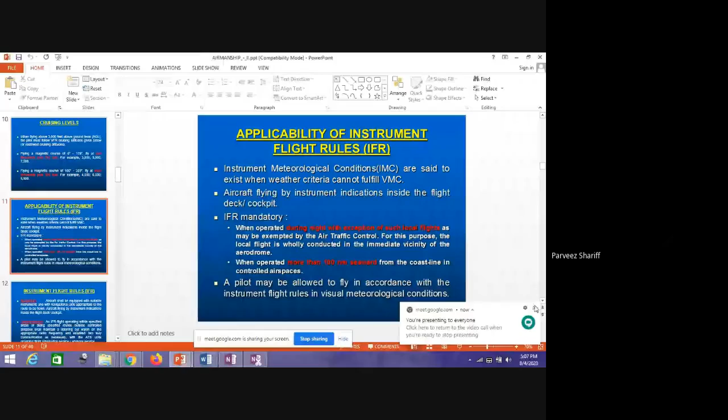So IFR mandatory conditions were discussed in the last class. No, sir. So this is the applicability of IFR rules, that is instrument flight rules. Instrument flight rules, I remember we have discussed it. We'll have discussion as you told.

No. So when the weather conditions are not favorable for visual meteorological conditions, then we'll go for instrument flight rules. Means we'll completely depend on instrument meteorological conditions.

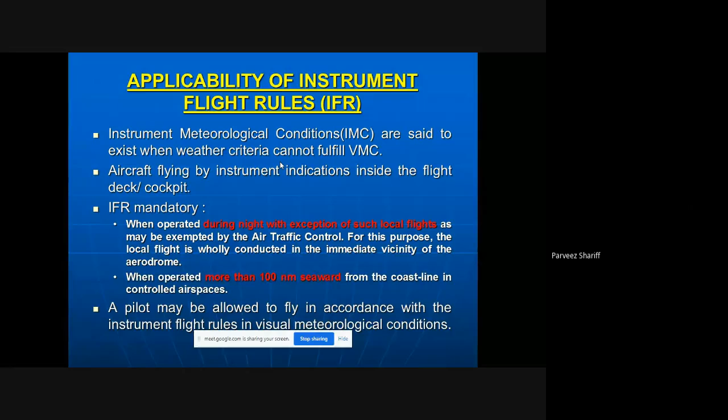So IFR mandatory conditions are when operating during night, with exception of such local flights, and when we are operating above 100 nautical miles towards the sea, means from the seashore. These are the conditions. The equipment should be well fitted with all the latest equipment which allows for navigation and communication. So that is what it means.

It means in IFR you should have a long range communication equipment so that you can communicate with ATC when you are flying on the sea beyond 100 nautical miles from the seashore, and the equipment should be fitted enough in navigational systems. You should be able to fly in the night time.

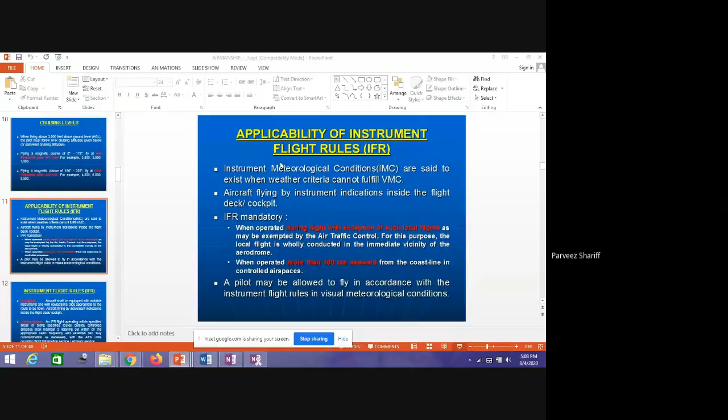So the minimum height is decided by DGCA as well as ICAO. What does ICAO stand for? Can anyone tell me? Let me write here so that you can see what I'm talking about.

International Civil Aviation Organization. Why are you so doubtful? Any other answers? International Civil Aviation Organization, sir. International Civil Aviation Organization. Very good. Okay, both of them are correct. Good.

Then what is DGCA? Directorate General of Civil Aviation. So where does this DGCA exist? India, sir. It works in India. Okay, very good. So this DGCA exists in India, with headquarters located in Delhi. So DGCA rules and regulations are meant for the vicinity of India, whereas ICAO is applicable internationally.

Okay, all the VFR, IFR, whatever rules have been designed, that is decided by ICAO. So the minimum height conditions in the IFR means in high terrain or in the mountains at a level of 600 meters or 2000 feet.

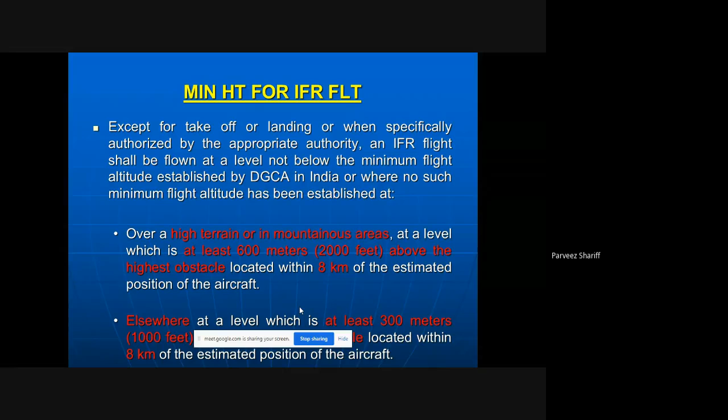So better you have only one kind of metric, so we'll talk in terms of feet. So 2000 feet above the highest obstacle within a radius of 8 kilometers. Elsewhere it is 1000 feet, again with a radius of 8 kilometers.

Okay, so this is very important. I think we stopped at this point, if I remember correctly. Yes, sir, so right of way. Oh, Kiran, now you got it. Okay, that's good. So there is something called right of way.

I gave an example of, I think, a gentleman and a lady. So when both are approaching at the same point, then what happens? Then the gentleman gives way to the lady, right? So likewise, I think I've given an example in the last class, so this is the order.

So balloons have got the right of way when compared to gliders, and gliders are given priority, and other tugs and gliders will give way for it. Then airships will give way for the gliders. Then helicopters will give way for airships, and power-driven conventional aircraft will give way for helicopters.

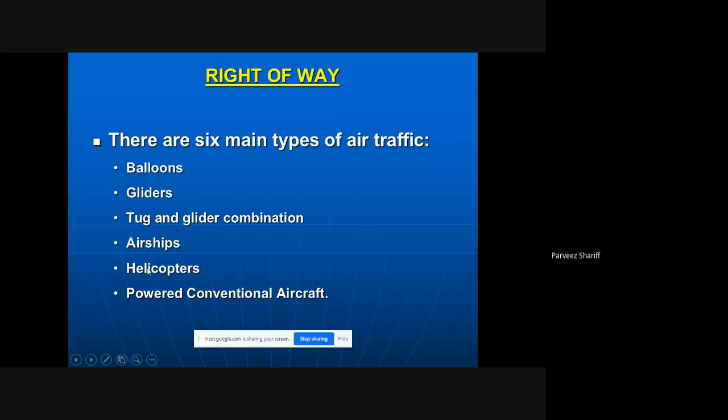That we'll see, what are the different conditions. So as I told in the last class, balloons don't steer, meaning you cannot control the direction of the hot air balloon. It can go in only one direction, either it can go high or it can go low. That's it. Whereas the other direction is driven by the flow of air.

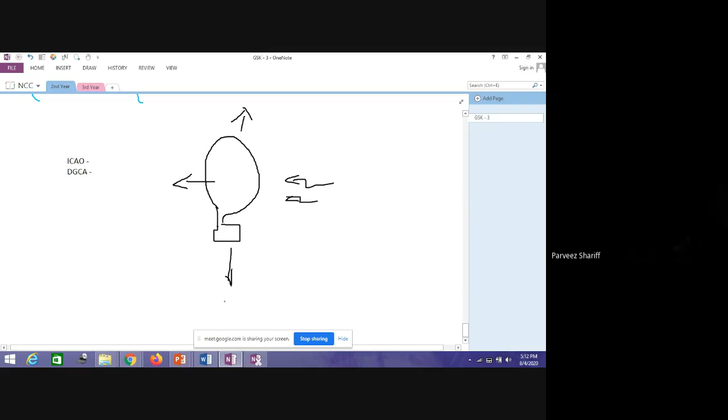If I write here, so if this is the hot air balloon, and this is the direction of wind, then what happens? This hot air balloon will be moving in this direction. Basically, it can go in one direction, that is either up and down, by controlling the flow of that heat. So it means all other traffic must give way to it.

It means whether it's a helicopter, glider, or fixed wing aircraft, if anything is coming, the first preference should be given to this balloon. Now let's come to gliders.

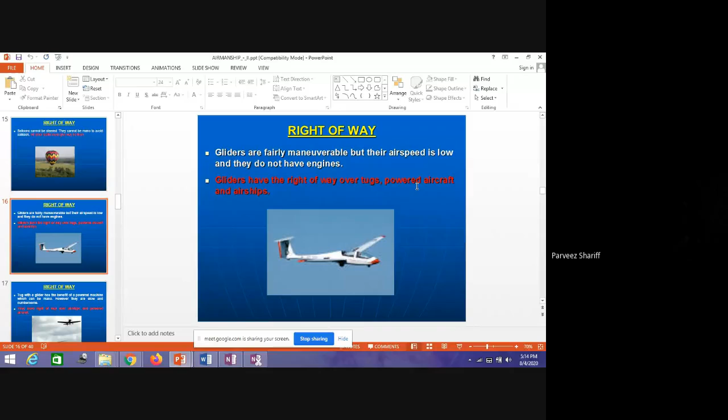So gliders are fairly maneuverable, but their airspeed is low and they do not have engines, as I already mentioned. So gliders have the right of way over tugs, powered aircraft and airships.

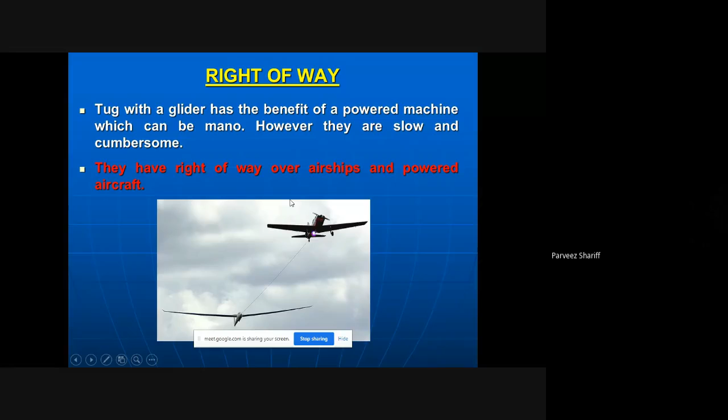Now there is no constraint with respect to power. Though this glider doesn't have an engine, it is pulled by another aircraft, so it is kind of power driven now. It has got certain high privileges, and in such case, these tug gliders can give way to gliders, but when compared to other powered aircraft, this has got the right of way over the airship and the powered aircraft.

And then come the balloons, airships. These are slow. These are actually the helium balloons, filled with helium. So this can have control in all three directions.

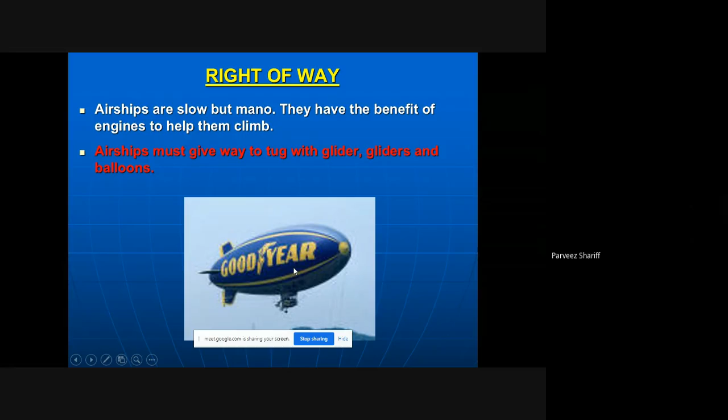And next comes the helicopter. Helicopters are powered and highly maneuverable aircraft. So they can give way to airships, must give way to tugs with gliders and balloons. It means before they approach for landing or before anything else, they can give way for other aircraft, which are the airships, tugs, and gliders.

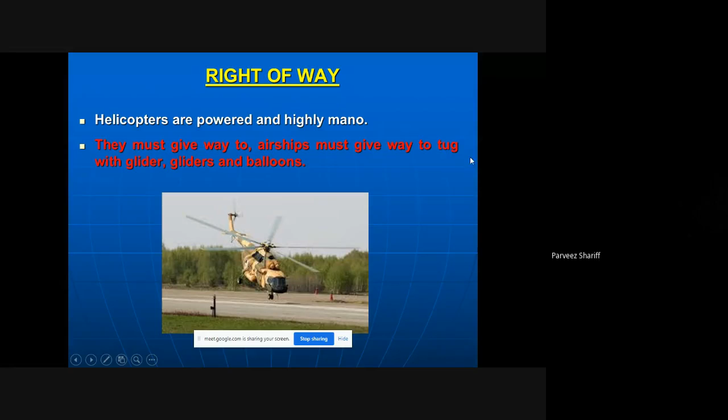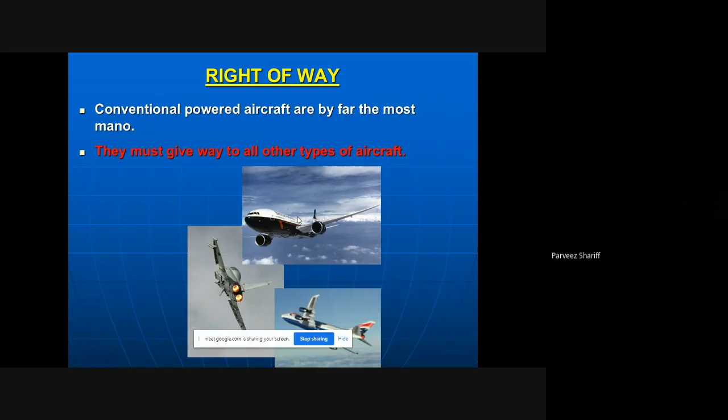Now these are the conventional powered aircraft. As you all know, whether it's a fighter jet or commercial aircraft, jet engine fitted aircraft, these are all conventional powered aircraft. This will give way to all other aircraft below, meaning gliders, balloons, helicopters, and others.

We will look at a few more different concepts here. The right of way rules are described by ICAO, the International Civil Aviation Organization, in their rule book in Annexure 2, Rules of the Air. This right of way is very, very important. It is not just any part of airmanship, it is a very important part of airmanship because it helps the two aircraft in the air avoid collision, and it has to be strictly followed.

So in Annexure 2 of ICAO, they have defined these rules of right of way. What is the right of way? The aircraft that has the right of way shall maintain its heading and speed.

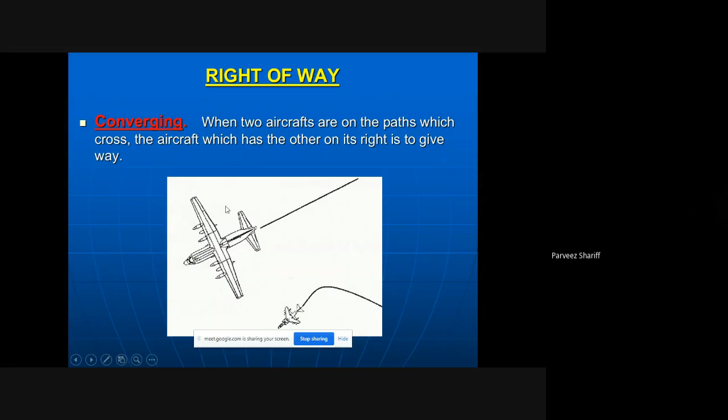If you look into this diagram, there is one big transport aircraft and one more fighter aircraft. The big transport aircraft has not changed its direction, nor has it decreased its speed. It is going consistently with the same speed and in the same direction, it has not changed anything. Whereas the other aircraft, which is on the right, has given way to this aircraft. This aircraft was flying in this direction, then it took a 90-degree turn and gave way for this aircraft. So that is what it means.

Now, an aircraft that is obliged by following rules to keep out of the way of another shall avoid passing over, under or in front of it, unless it passes clear. I'll show you that turbulence and other things.

Then, approaching right of way when it is in air. There is another right of way which is applicable during approaching. When two aircrafts are approaching, meaning coming in for landing, then who has to be given the way?

Then converging, meaning again this is in air. When two aircrafts are converging at the same point at the same level, meaning they are coming perpendicular to each other, then the aircraft that has the other on its right shall give way.

Except as follows, meaning it follows a certain priority: power driven aircrafts shall give way to airships, gliders, and balloons. Then airships give way to gliders and balloons, and so on.

The priority follows. It means if a glider and a conventional aircraft are coming perpendicular to each other, it doesn't mean that because the glider is on the right side, it has to give way. No. In that case, any powered aircraft, even a jet aircraft, will give way to the glider. That is what this says.

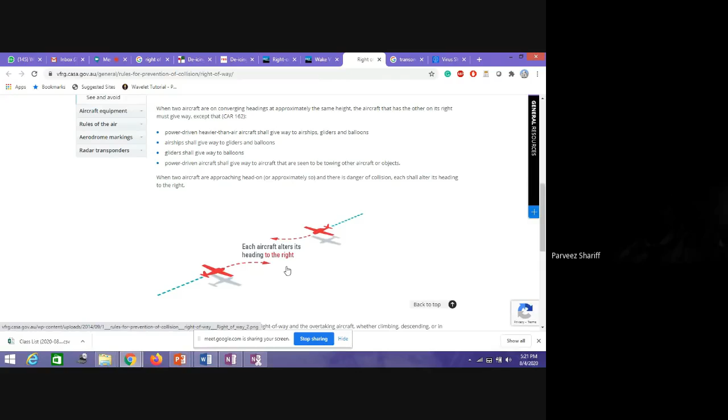Now, if two aircrafts are approaching opposite to each other, what happens? In this case, both the aircrafts will take a heading, meaning they will change their heading towards the right - both aircraft, this one goes right, and the other aircraft also goes to the right side.

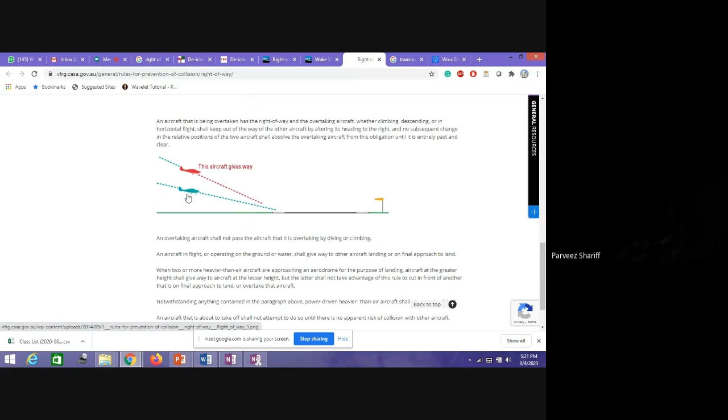And when two aircrafts are approaching, now the two aircrafts are one above the other - one is a blue aircraft, one is a red aircraft. The aircraft which is below is given the way by the aircraft which is above. So this aircraft gives way to the blue aircraft, meaning the blue aircraft is allowed to land, and the red aircraft has given way, so it will come next time.

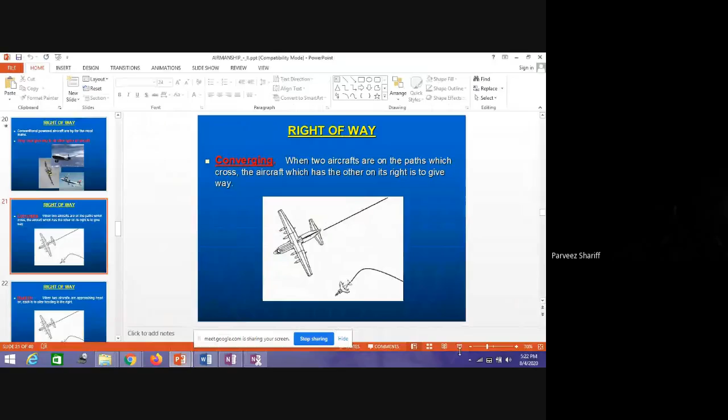So I hope you are clear with this concept of right of way. This is very, very important.

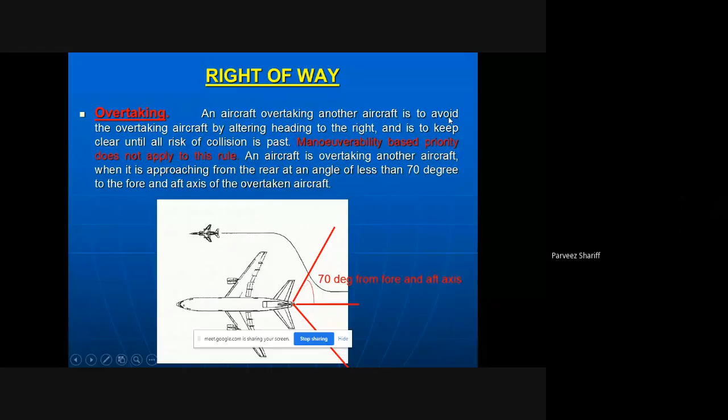Now this is the overtaking case. When an aircraft overtakes another aircraft, there are certain rules which need to be followed. The aircraft which is coming behind has to take a 70-degree turn from the fore and aft axis, and then it has to move forward.

The aircraft which is coming behind has to take a 70-degree turn from the fore and aft axis, and then it has to move forward. So when the aircraft overtakes another aircraft, that is what happens.

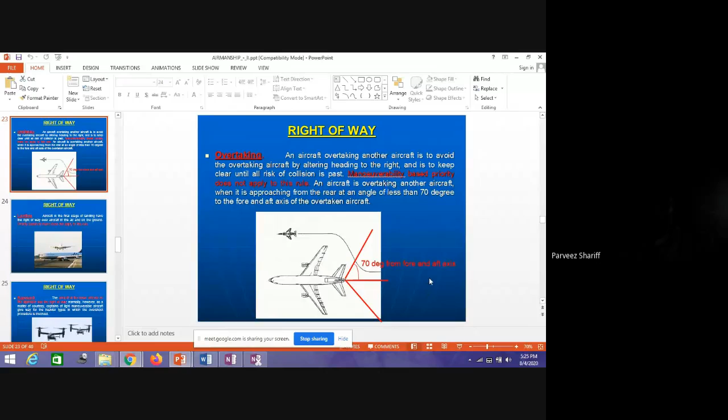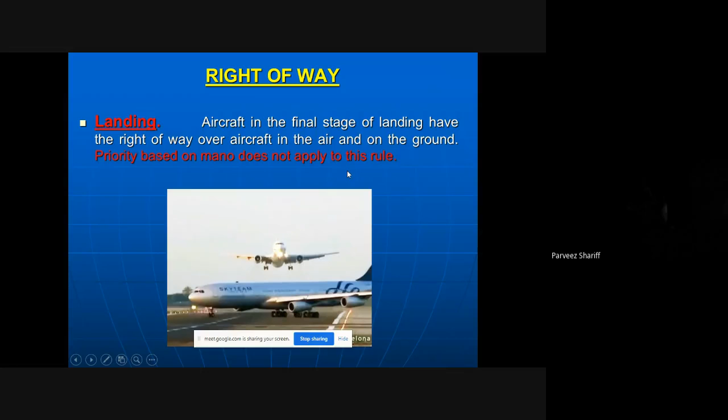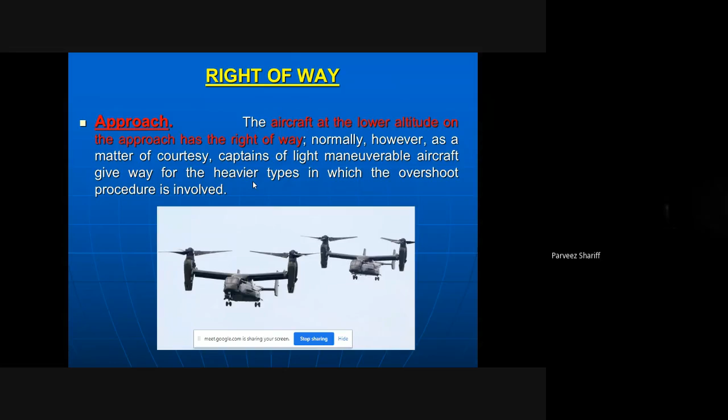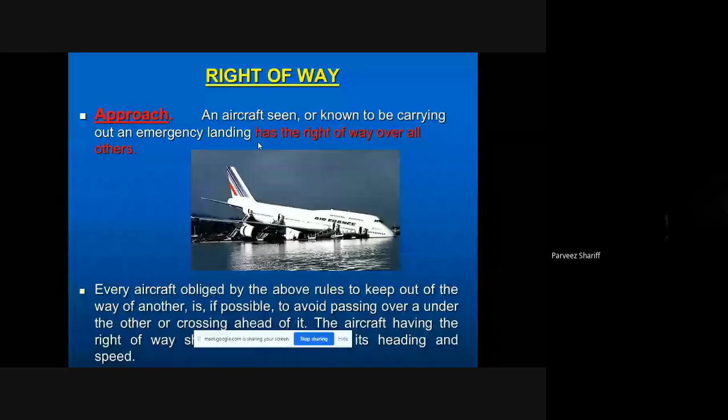So, an aircraft seen or known to be carrying out an emergency landing means any aircraft in an emergency has the highest right of way. The first preference for right of way should be given to such aircraft with emergency conditions.

Now, right of way on ground. Whatever you have seen so far is with respect to air operations. You have to be very clear. Now what happens on the ground? Now the aircraft is on the ground.

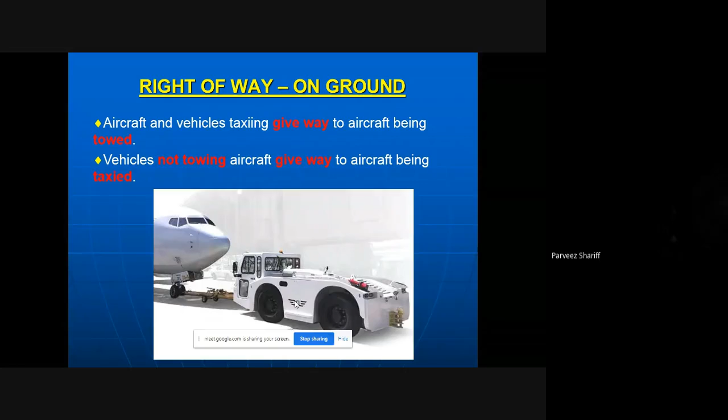Now, aircraft and vehicles taxiing give way to the aircraft being towed. There is a difference between these two, please understand. This is connected to a tow vehicle, correct, but it is not moving—when it is not moving, preference is given to the taxiing aircraft. But when it is being towed, preference is given to the towing vehicle, because a taxiing vehicle can stop for a while on the taxi path, whereas the towing vehicle needs to be given first preference to pass over.

The light indications during navigation in the dark, or even in VFR conditions, help identify the other aircraft to the pilot, so which side it is on, whether it is approaching or going far. That makes the decision very clear, indicated by different lights.

The starboard is indicated by green light, the port side is indicated by red light, and the tail section is indicated by white light. You have to be very clear with this - different color points on the wings, wing tips and rears help the pilot judge the direction of other aircraft.

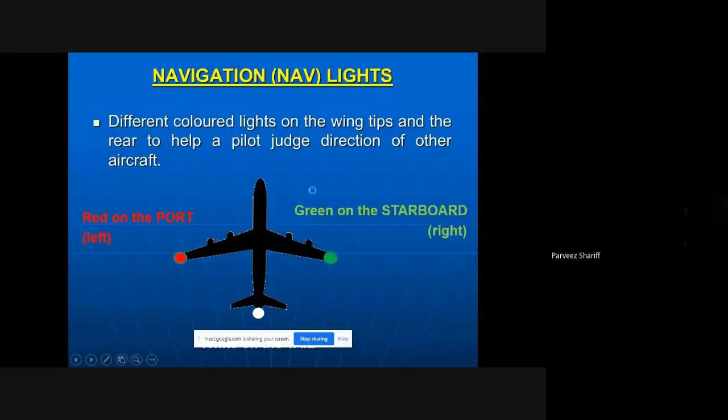For fighter aircrafts, same thing: starboard green, port side red, but the tail section is yellow instead of white. For gliders, there is no starboard or port side, only one yellow light. For balloons, there is only one red light.

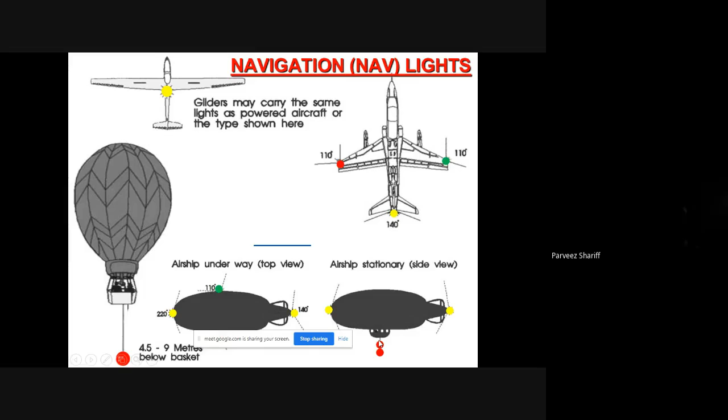For airships, there are yellow lights at the front, green lights above, and below will have the red lights.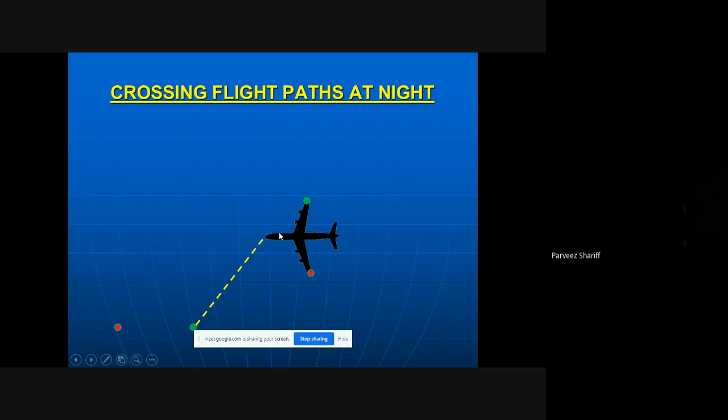Now what happened? This aircraft has seen this green light. So now this has got the privilege and it will go. It means again the second aircraft has to give way to this aircraft. Got it?

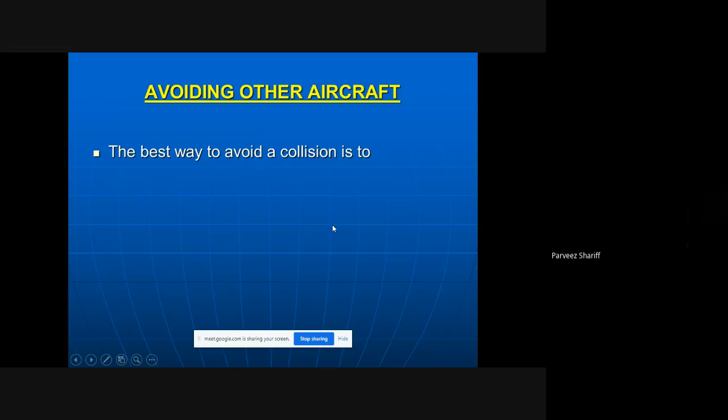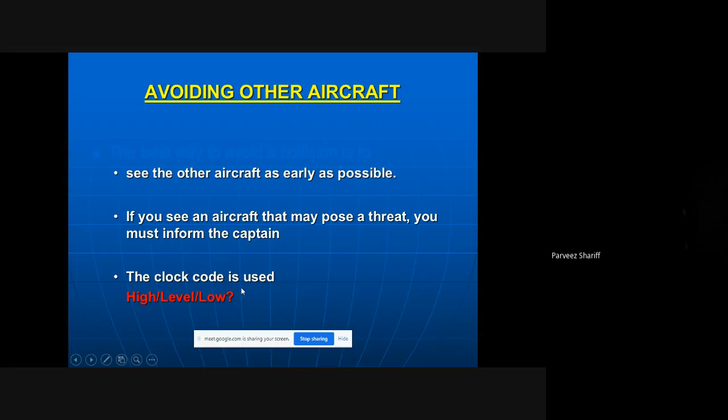Then avoiding other aircrafts. The best way to avoid aircrafts is to see the other aircraft as early as possible. If you see an aircraft that may pose a threat, you must inform the captain, and the clock code is used - that is high, low, level, and high.

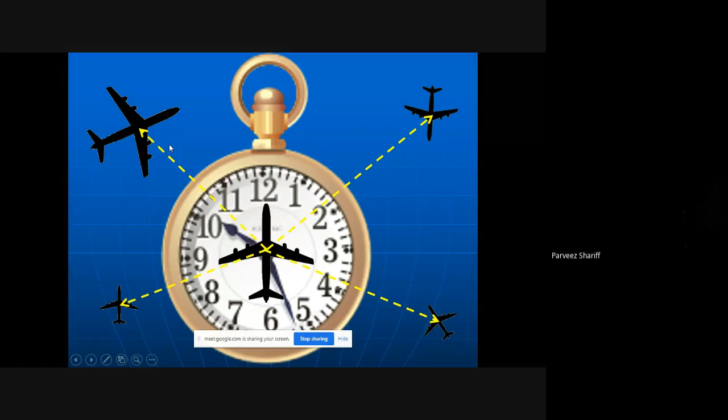Now, if you look at this aircraft, what is its direction with respect to the clock? If you're standing somewhere here, it is at 11 o'clock. Now it is high because it is descending - it is coming closer to this aircraft.

For example, if you're standing here in the center of the screen, I'll play this again. What happens? This aircraft is coming close - it means it is a high alert, and the code is high. It is at 11 o'clock, coming from left to right, and it is descending.

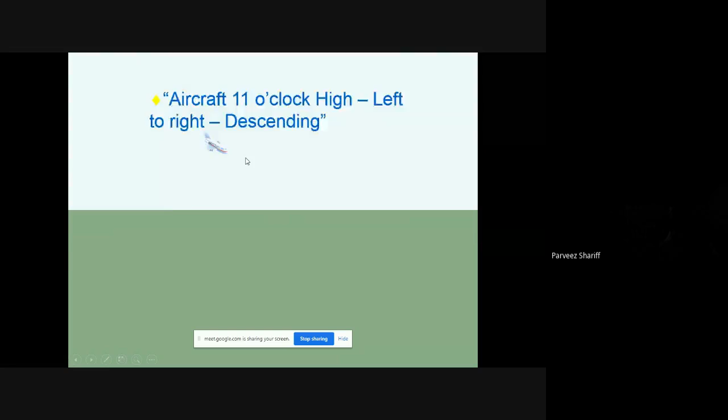Compliance with rules: for most small aircrafts flying outside controlled airspace in good weather, the pilot is responsible for maintaining a safe distance from other aircraft. This is called see and be seen, meaning the pilot has to see and to be seen. That is the first principle of VFR, visual flight rules.

For an aircraft flying inside controlled airspace, the pilot is still responsible for maintaining a safe distance from other aircrafts. They also strictly follow IFR, that is instrument flight rules.

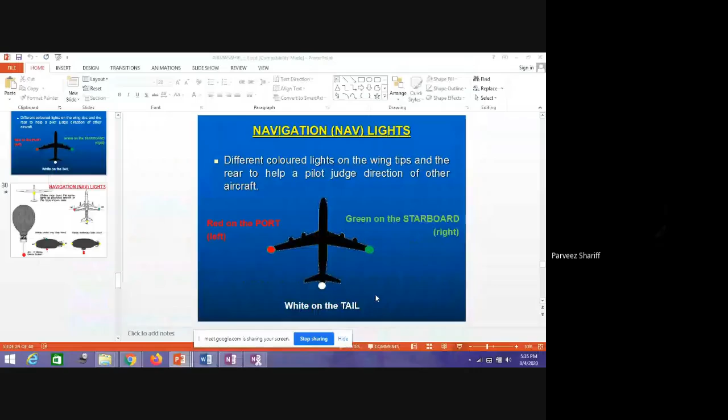Okay, so compliance with rules and other topics we'll talk in the next class. But before winding up, I want to talk about one more topic.

Right of way is over. But there is something called vortex turbulence. This is very, very important. So when we talk about right of way, why is it important? Vortex turbulence.

Because two aircrafts cannot come very close, because when an aircraft is flying, the tips of the wings create some kind of turbulence, and that air is rotated in an anti-clockwise direction on one side and clockwise on the other. This creates wind turbulence. It is for a short while, but still it is very strong.

If any aircraft is flying very near to this, then due to that air turbulence, that aircraft may lose altitude or lift. It also affects the same aircraft which has created this turbulence. You know the principles of flight, the aerodynamics - the air below the wing creates more pressure, and the pressure above the wing becomes less. Am I telling it wrong?

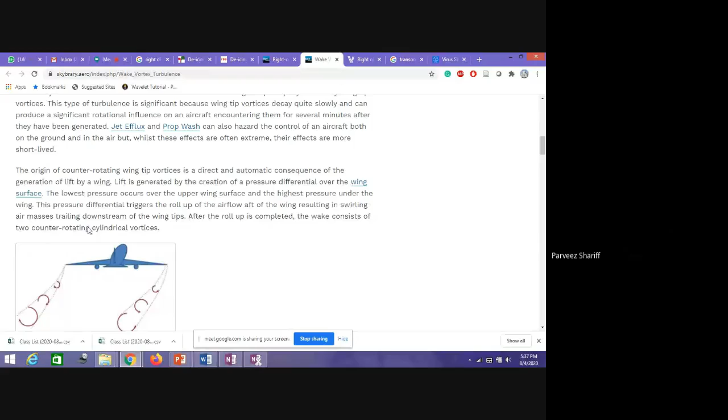So if you look at some aircraft, the tips are turned vertical like this to counteract this turbulence. That is another thing, and there are a few cases where due to this turbulence some incidents have happened. Now I just want to highlight an Airbus 319 and Boeing 747 case.

Means what happened? This Airbus 319 was flying behind a Boeing 747. Then the 319 experienced this vortex turbulence, and its trajectory rolled up to 55 degrees. So this is one such case, in 2008. It's a very severe effect, this vortex turbulence.